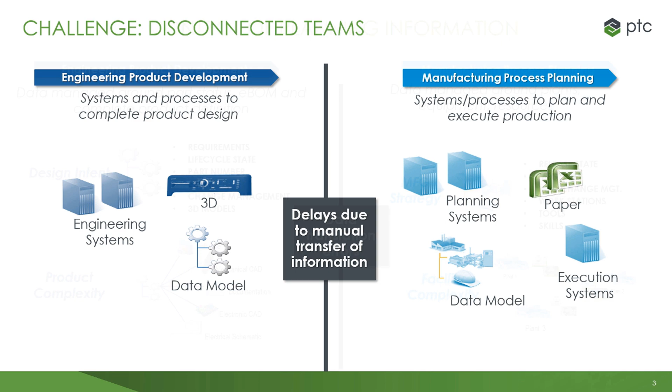Inconsistent data management results when each area of the business focuses on managing only a portion of the entire product definition. It is common for product design to be totally focused on the development of the product. To do this, they concentrate on the design intent and define the product details based on how they do their work. Product development often organizes their data by the type of design data and groups of design features.

It is also common for manufacturing planning to be focused on defining how the product will be produced. They concentrate on the manufacturing strategy and define the manufacturing plan based on utilizing production methods aligned to a facility's capabilities and the factory floor layout. In some cases, manufacturing engineering needs to consider variables resulting from multiple factory locations and strategies.

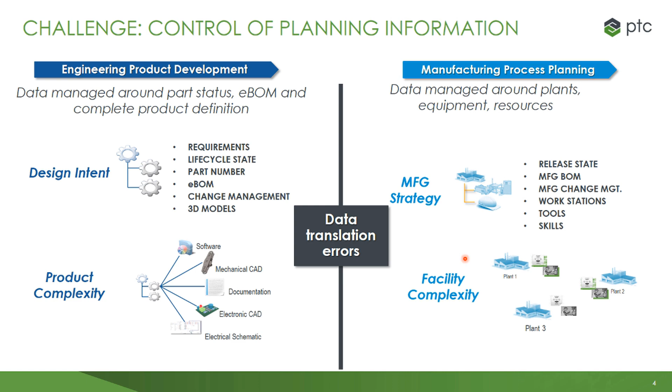Each group's focus on their own deliverables and data, combined with a patchwork of data transfer methods, often results in data translation errors and leads to delays in dealing with design updates and changes prior to the product's start of production. During development, the engineering product development teams will typically perform product design reviews to improve and enhance the product.

Manufacturing engineering uses design for manufacturability reviews to identify potential manufacturability issues before production begins. If manufacturing engineering is not involved early in the design process, they will not be aware of key manufacturability issues, and it may be too late to modify the design to eliminate those issues, or the last-minute change requests from manufacturing engineering needed to support the factory requirements can impact the product's start of production date.

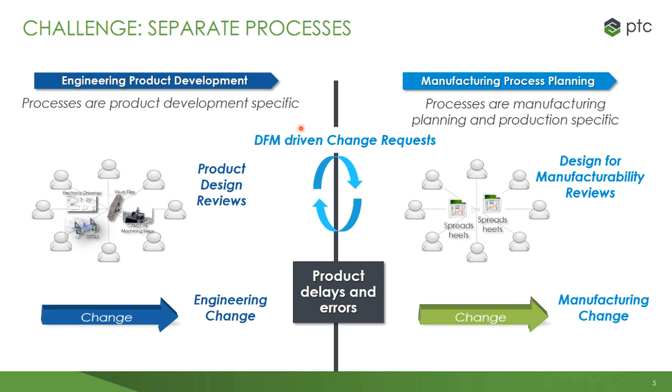These separate processes are usually the result of different goals, objectives, and deliverables for each group. These differences limit the organization's effectiveness and lead to missed opportunities. When we look at the manufacturing engineering teams, we see that they have the responsibility to plan production for a single product that could be produced in multiple plants with varying resources, machines, and worker skills.

When the companies do not have standard manufacturing processes that include detailed information about a specific factory's capabilities, the manufacturing engineer's job becomes very challenging. Most companies do not have a way to manage a central library of plants, workstations, worker skills, and tools.

If manufacturing engineers could leverage existing knowledge, they would be able to reduce the effort to develop manufacturing process plans for multiple plants. The missing management of factory capabilities and manufacturing processes limits the business's flexibility to decide where a product should be manufactured.

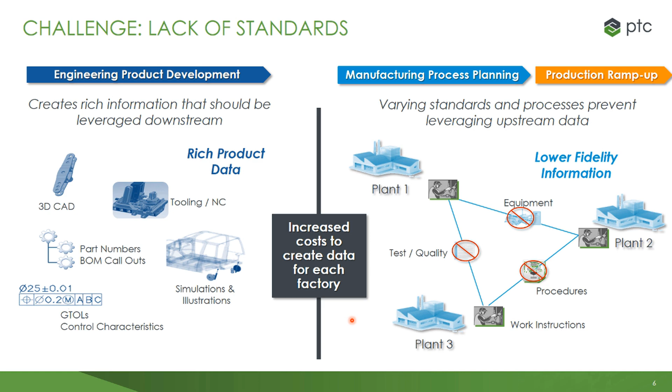The business costs resulting from these challenges are significant. Delays in the transfer of design information to the plants, data quality issues, late changes to the design, all have a direct impact on the product development costs, the quality at start of production, and missed launch dates.

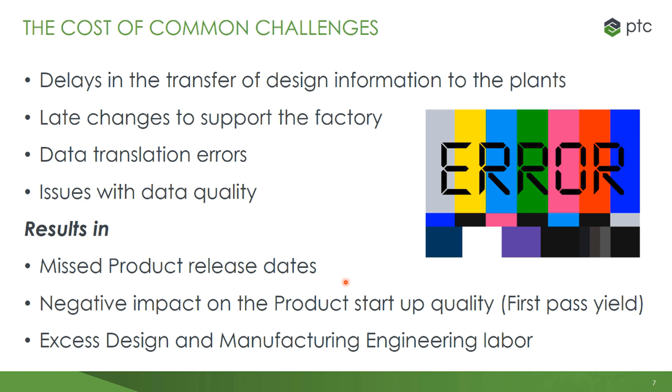For the remainder of this session, we will focus on a fundamental process that will enable your product delivery processes. This fundamental process is the transformation of a product's EBOM into an MBOM. The resulting BOM is required to support all of the manufacturing planning activities and deliverables. Using the right tools and methods to create this critical set of information will give your business a competitive advantage.

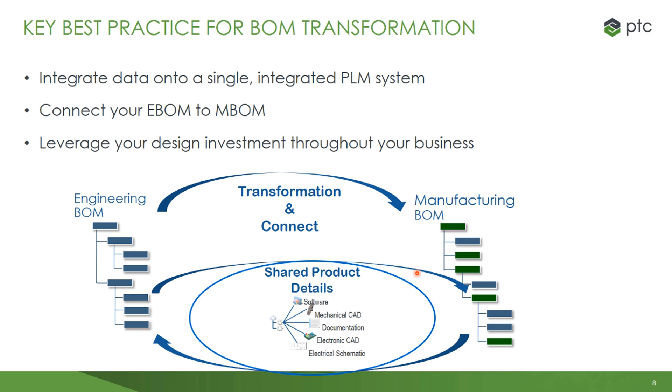In the upcoming demonstration, you will see how completing the EBOM to MBOM transformation process within an integrated PLM enables the entire product development team to leverage the 3D models, EBOMs, MBOMs, and product specifications throughout all aspects of the business. Two key aspects of the PTC toolset that will be highlighted in the upcoming demonstration are: 1. The ability to quickly create a restructured and enhanced bill of material from an upstream source, and 2. The capability to create links between the BOM components in different types of bills of material.

The restructuring of BOMs allows the business to accurately align the organization of an MBOM's components to match the requirements of an ERP system. Structuring of a service BOM will support a company's aftermarket business processes. The component-to-component links explicitly capture the details of the source and destination of the BOM components between bills of material. This linking also allows the system to indicate how changes to design will impact specific components in a downstream BOM.

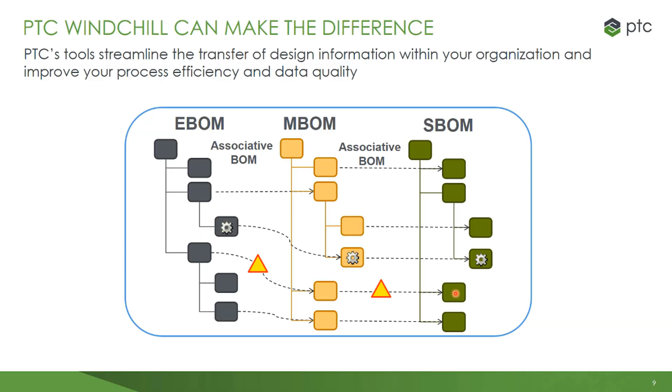Let's get started with the demonstration. This demonstration will show how the PTC MPMLink BOM transformation tool can support the early engagement by manufacturing in the product design process. Traditionally, the design process has included the major activities of concept development, system design, detail design, followed by the development of the MBOM and manufacturing plan to support the production ramp-up and full-scale production.

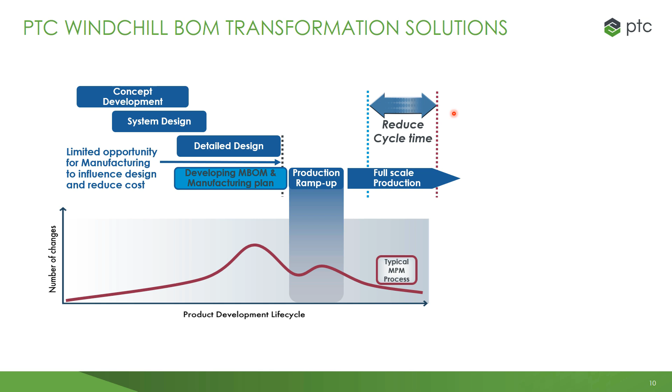This serialized approach limits the opportunity for manufacturing to influence the design and reduce costs of the product before the design has solidified. Using the MPMLink tool can provide your team an opportunity to overlap the development of the design, the MBOM, and the manufacturing plan. The coordinated design and manufacturing planning activities will lead to a reduction in time-to-market cycle time for your product. It will also shorten the timeline and provides for the collaboration within the product design teams to reduce the cost of changes during the design process, as well as a reduction in the final manufacturing cost.

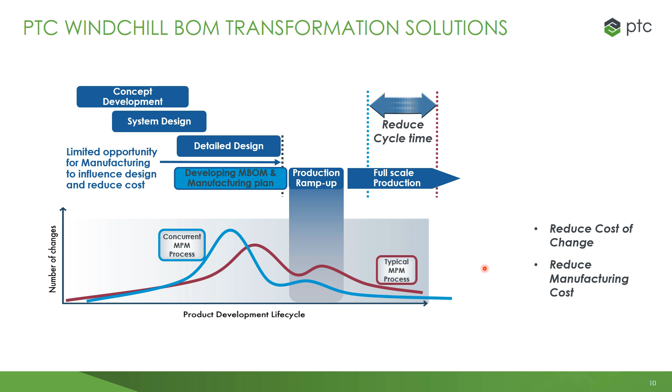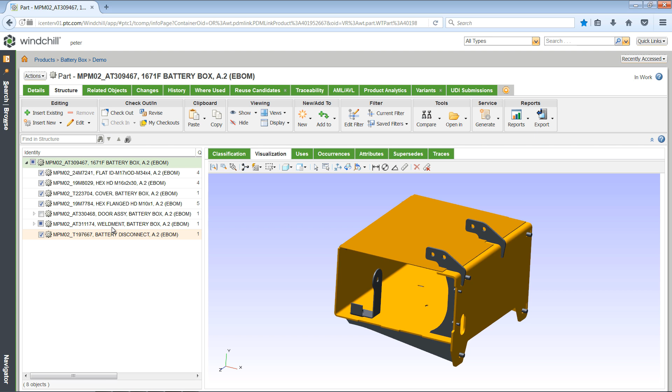For our demonstration today, we will be using a battery box that is part of an off-road vehicle. Using EBOM visualization, we look at the design by turning off and on the visibility of specific parts to allow for a detailed design review. Changing the part structure view options results in the display of the CAD model details for each of the EBOM components.

Continuing a design review, the Part Structure to CAD Structure Compare tool is selected. Confirming the comparison set, the system displays the Windchill Part BOM and CAD BOM in side-by-side panels. Selecting a BOM component on the right side highlights the corresponding component on the left side.

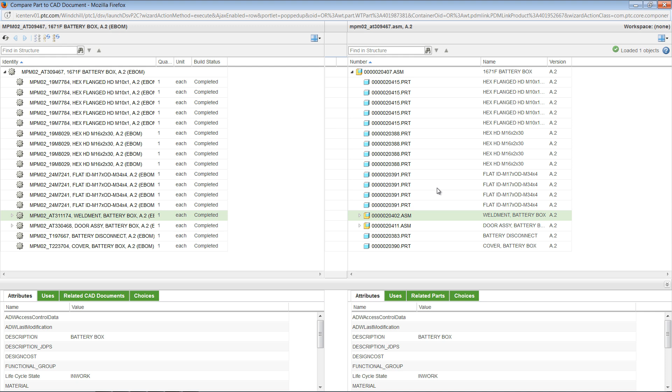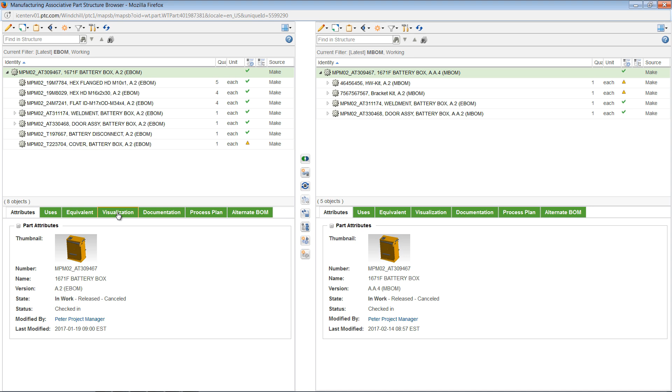Now we begin the EBOM to MBOM transformation by opening the Design EBOM in the Manufacturing Associative Part Structure browser. The EBOM is displayed in the left panel, and the right panel is displaying a partially transformed MBOM. Notice that the 3D visualization provides a good way to understand both the CAD structure and the shape and interfaces between the components in the assembly.

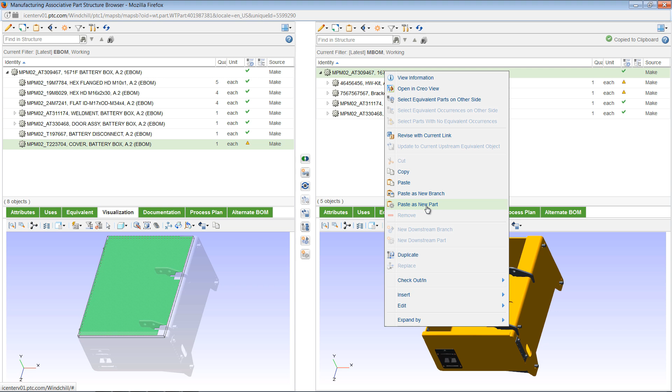For the next step in the BOM transformation, the visualization indicates that the cover has not been placed in the MBOM. Since our manufacturing strategy is to purchase this from an external source, we will use the copy-paste action to create a unique manufacturing part number in the MBOM. The Paste as New Part dialog defines a new part number by adding a suffix to the engineering part number, but other numbers can be used to match your ERP requirements.

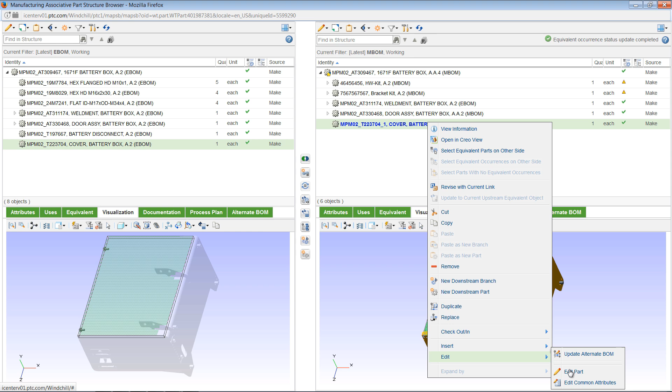Once the new manufacturing part is displayed in the MBOM, we will need to edit its source attribute to indicate this is a purchased part. Using the action menu on the cover part, the Edit Part dialog panel is opened. We proceed by picking the Buy option for the source attribute. This is followed by a check-in action to record this change in the PDMLink database.

A quick visual comparison of the BOMs shows that the MBOM has source defined as buy, and the equivalent EBOM cover part has source defined as make. Checking the design view, we can clearly see that there are two fasteners that have not been placed in the MBOM. Selecting these items directly, followed by a copy-paste action, adds these items to the MBOM.

At this point, a review of the design view confirms that all components have been placed in the MBOM. The MBOM is now checked in to the database as complete. Prior to the demonstration, an initial EBOM to MBOM transformation resulted in the placement of 5 fasteners into a kit and a subassembly in the MBOM.

To review the distribution of these items, we select the EBOM component and then request the Select Equivalent Parts on Other Side action. This expands the MBOM structure to show where the individual fastener components are used in the MBOM. These items can be visualized by using the Show Selected option in the MBOM visualization panel.

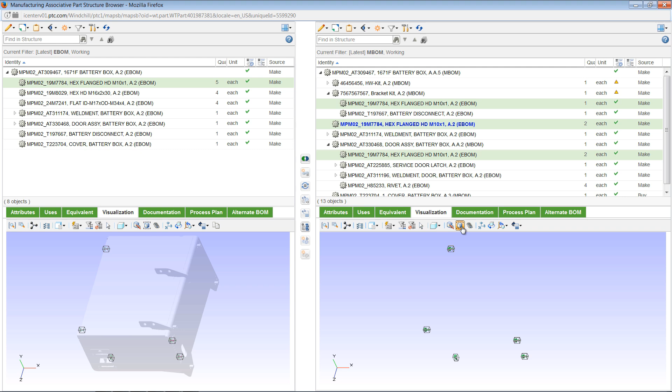A critical aspect of a robust design process relies on the ability for all team members to see the progress of the design and manufacturing engineering teams. Using PDM Link to display the battery box design allows everyone on the product delivery team to see the current elements of the EBOM design view.

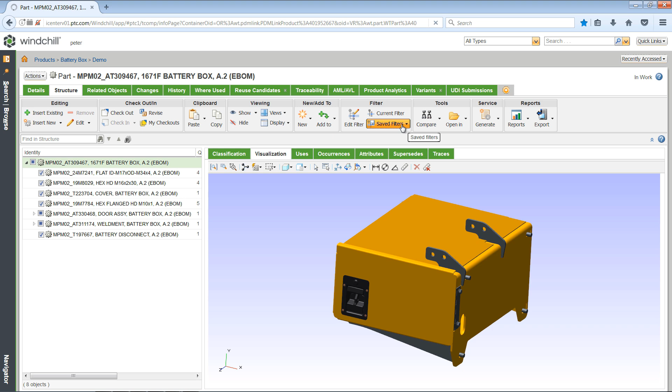Setting the filter to MBOM allows team members across the organization to review the results of the EBOM to MBOM transformation. The displayed MBOM structure detail provides insight into the manufacturing strategy. Using visualization, the external and internal components are clearly visible.

During a design review, it was decided that a label was needed on the face of the battery box door. Using Creo Parametric, the engineer adds a new part to the Creo assembly that defines the label. Following a Creo check-in, PDM Link automatically updates both the CAD assembly structure and the PDM Link BOM.

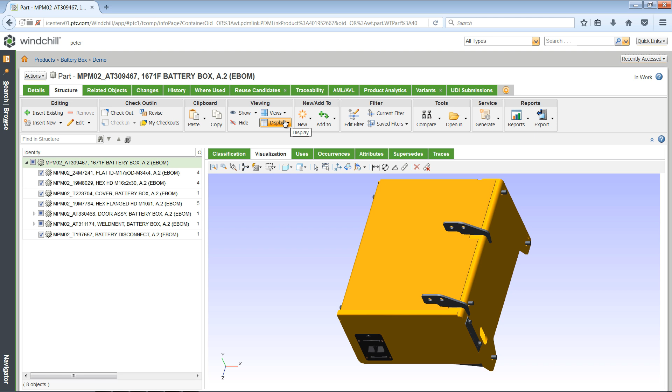Refreshing the EBOM visualization for the design immediately reflects the results of the design changes. Note that the MBOM visualization of the battery box is reflecting the earlier design configuration. The Manufacturing Associative Part Structure browser is open to update the previously transformed MBOM to reflect the new door label.

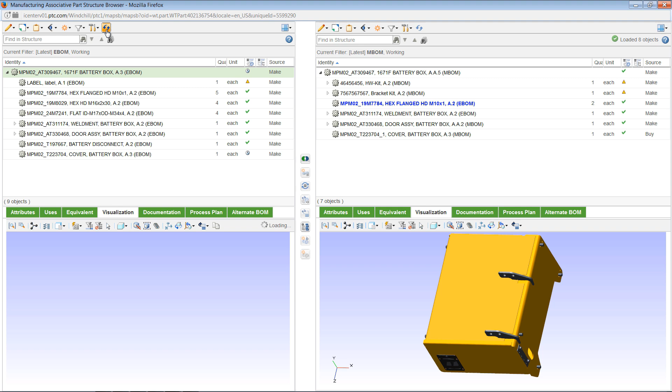Refreshing first the EBOM followed by the MBOM results in the maps displaying both the current BOM structures and the corresponding visualizations. Note that the top assembly MBOM part is displaying a clock icon indicating that it is out of date in relation to the EBOM equivalent part. Starting with the top part, the Update to Current Upstream Equivalent Object action is applied. This reestablishes an updated equivalence link between the parts.

The MBOM cover part is also displaying a clock icon indicating that it is out of date in relation to the EBOM part. The same Update to Current Upstream Equivalent Object action is applied. Refreshing the MBOM visualization shows the new door with a location for adding the design view label.

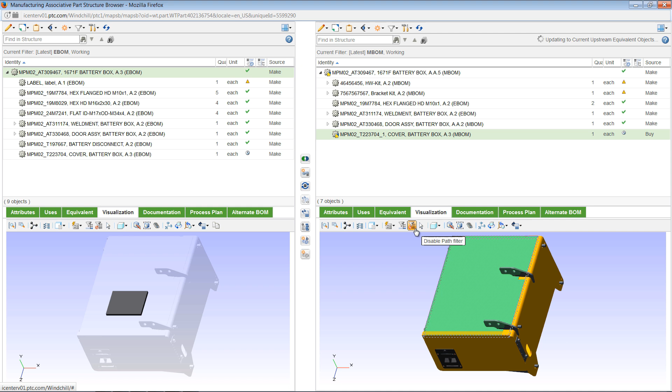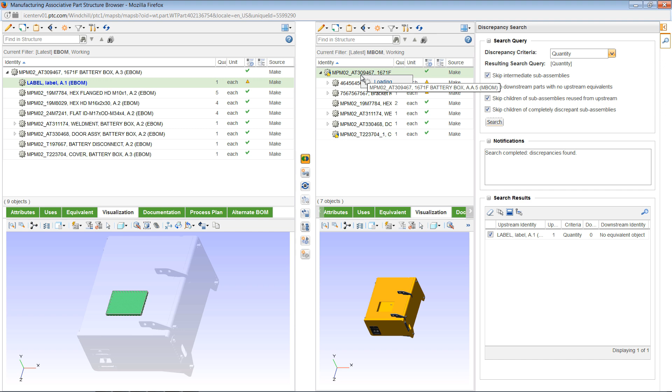Rather than manually searching for the label part in the EBOM, the Discrepancy Search feature is selected. The tool identifies that the EBOM label part is missing from the MBOM and is highlighted in both upstream panels. Using a copy-paste action, the label part is added to the MBOM, and the visualization panels for both BOMs are updated to reflect the action that was taken.

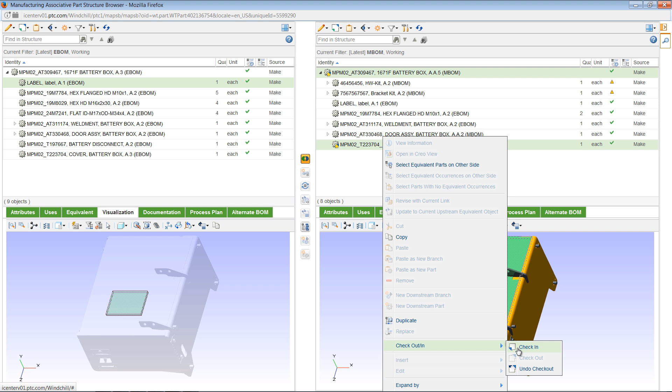Re-executing the discrepancy search returns an empty list indicating that all of the EBOM components are included in the MBOM. As the final step in the EBOM to MBOM transformation process, all updates to the transformed MBOM are checked into the PDM-Link database. Utilizing the MBOM view on the PDM-Link part details page, we can see that the updated MBOM is now available for sharing to the entire product team.

The focus of this demonstration was to highlight the value for your product development teams to be able to simultaneously complete the design and manufacturing engineering activities in advance of a production ramp-up. This will shorten your product's time to market and reduce the cost of change and the cost of manufacturing.

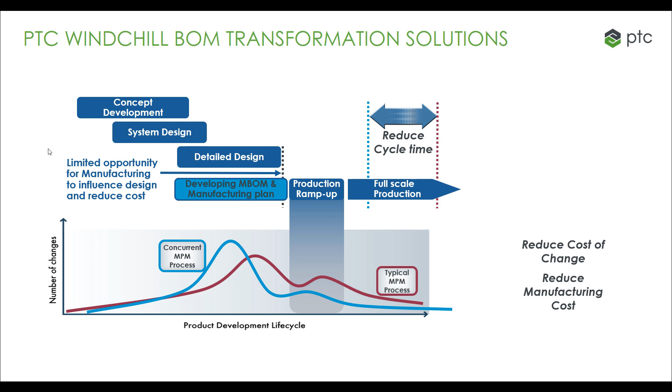Now let's do a review of what you have seen during this demonstration. We started by completing the EBOM to MBOM transformation for an initial design. We then highlighted the capability to share the manufacturing and design engineering results to the entire product development team as MBOMs and EBOMs with 3D visualization.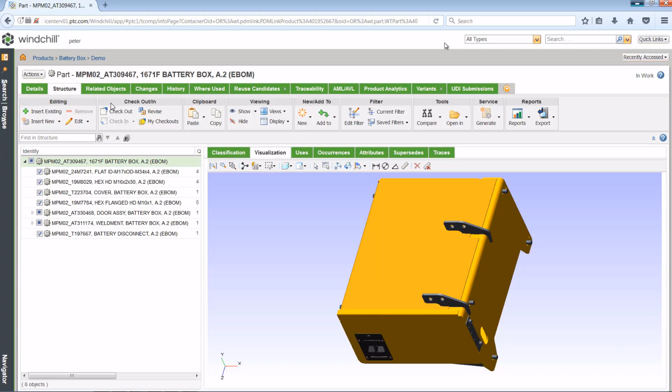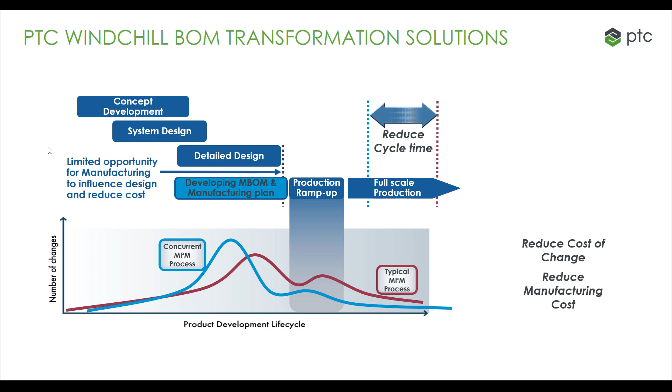We showed how a design review triggered a change to the original design that resulted in a label being added to the battery box cover. The final steps of the demonstration included an incremental update to the initial transformed MBOM using the Manufacturing Associative Part Structure Browser.